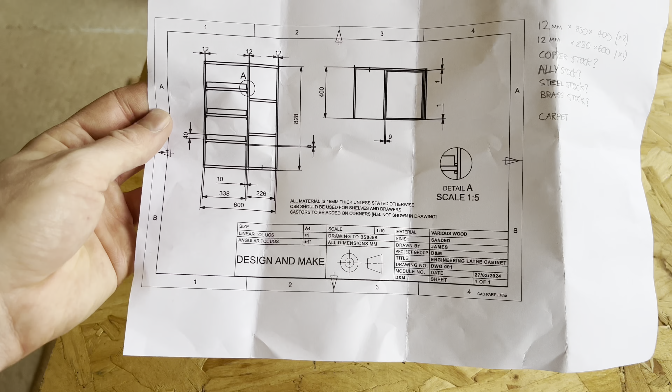Today I'm going to be making a new lathe cabinet for my engineering lathe. I've got some sketches here which I'll talk you through, but the first thing to do is cut all the timber to size, and whilst I'm doing that I'll overlay some images of the design I've come up with.

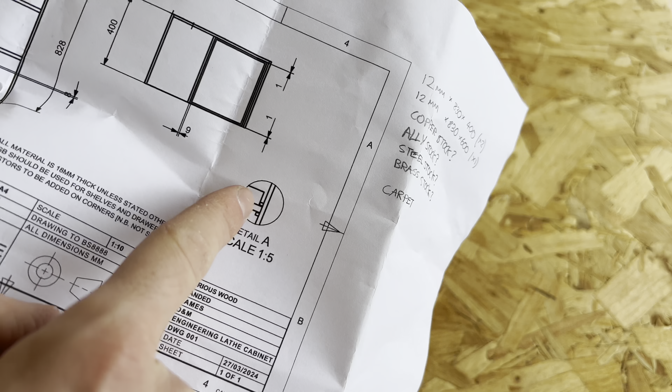So just as a brief overlay here, this is what I'll essentially be designing with some drawers here, which will only be 40mm high, so they won't cover the full depth, 3 shelves, and a base and top. There'll be some casters on the bottom, and you can see a few notes here. I am going to change the OSB part as I haven't quite got enough timber to do that, so I'll use some of the other timber to save me having to buy more. You can see this is how they're mounted with 2 little pins made out of wood, and that's how the shelves and drawers will be slid out.

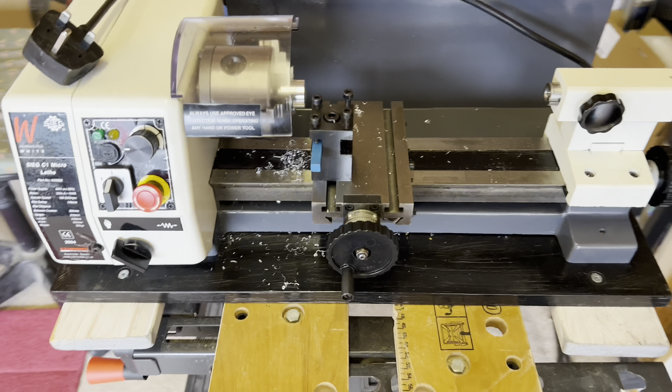It's my new engineering lathe. It's a SIEG or SIEG C1 micro lathe from Axminster, about 10-15 years old. It's brilliant. It's got auto feeds, really nice travel on all the slides, tailstock, and obviously a nice 3-jaw chuck. I am quite familiar with metal lathes, having used them quite a lot at university, so it's something I've been looking at getting for a while.

So I'll do a little bit of a more in-depth video about that, but this video is mostly focused on building a cabinet for it. It's a very typical British day, pouring rain outside, so I may have to bring the shutter down if it gets too wet, so the lighting may decrease slightly, but I'll do my best to keep it open. So I'm going to start by cutting all of the side panels, and then we'll work on doing the top and bottom. So let's get going.

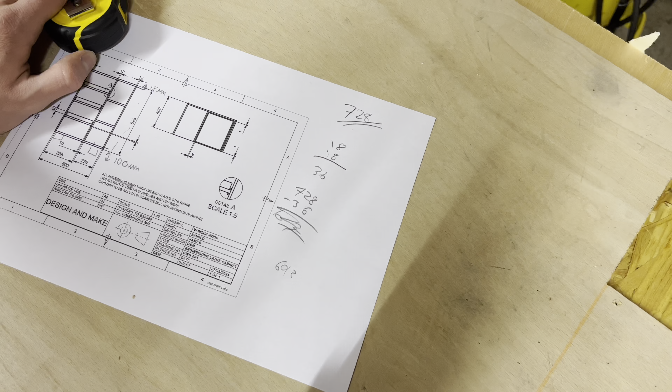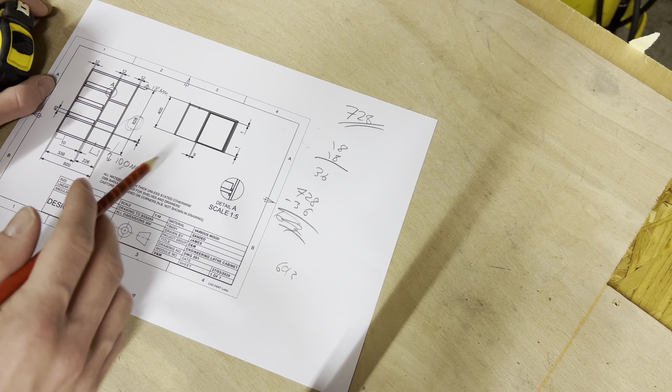So reviewing these sketches, I realised I made one mistake. I forgot to account for the height of the casters, which would be 100mm. So by doing this, I need to reduce this total height by 100mm, which is fine because that just gets me 728mm. I forgot to add this into my CAD model, which is fine because I can just correct it here. I could go back and edit the drawings, which would only take about 5 minutes, but it's only the height dimension that gets altered, so I'm not too concerned about that.

These bits will obviously also be altered, but everything just gets reduced by 100mm, so that'll be 33.3, and that'll be 33.3, etc, for these ones. So it's not too difficult to do. So that now means I need to cut the length of the panels to all be 692mm, which will get me that one, and that one. So we're going to go and cut those now.

For the side panels, I used the table saw to rip them down. These were only about 9mm thick. The drawings originally specified 12, but I didn't actually have any 12mm in thickness, so I just used the 9mm instead. I then used the jigsaw to cut the other panels, purely because I didn't really have the space to work around where the table saw currently was, and I also didn't fancy having to change all the settings when I still had another side panel to do.

So I just used the jigsaw instead for a change, and to be honest, I hadn't used the saw for quite a while, so it's quite nice to get to use a different tool again.

For the runners which the drawers were to sit on, I used the table saw as I wanted them all to be exactly the same dimension, so rather than trying to do this by hand with the jigsaw, I opted for the table saw. So what I'm doing now is laying strips down for where the drawer runners will sit. Now what I've done is left about a 1mm gap each side, and this will just allow them to expand and contract and have a bit of wiggle room as well as they move about in the slides.

So by the looks of things, I didn't film any footage of how I put the runners in, but all it was, was simply measuring the distances and then setting up some sort of parallel blocks just so that I had each of the runners set at a certain height.